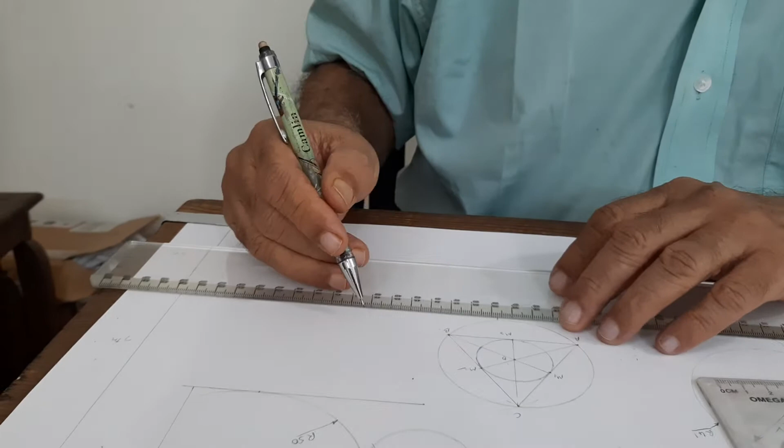We have already started working on triangle, but before that I want to say one thing: when you are drawing on both the sides of the sheet, if you earlier drew on this side and you continue on the next side, then you need not have title blocks on both the sides. Here you need not draw the title block again, or name block, whatever you may call it. The title block is to be drawn only on one side of the drawing sheet, on the right hand side bottom corner.

Now we draw a triangle of, let us say, first of all, no, we draw a circle. The triangle has to be drawn, but it has to be tangent to the given circle. So we take a circle of 25 millimeter radius. This is also quite reasonably good size. 25 millimeter radius. We draw a circle now.

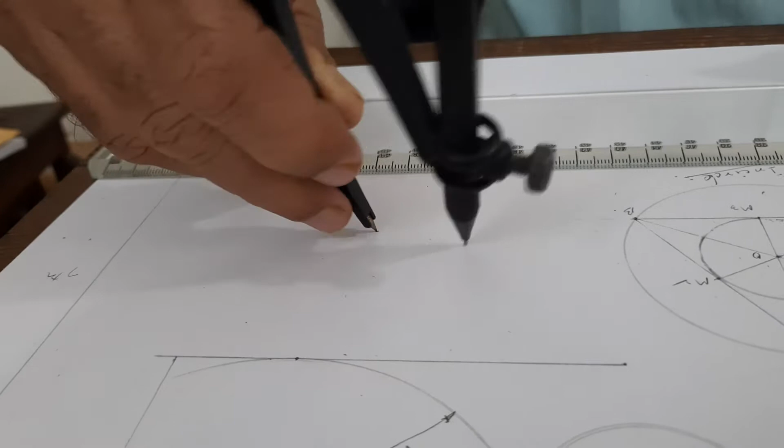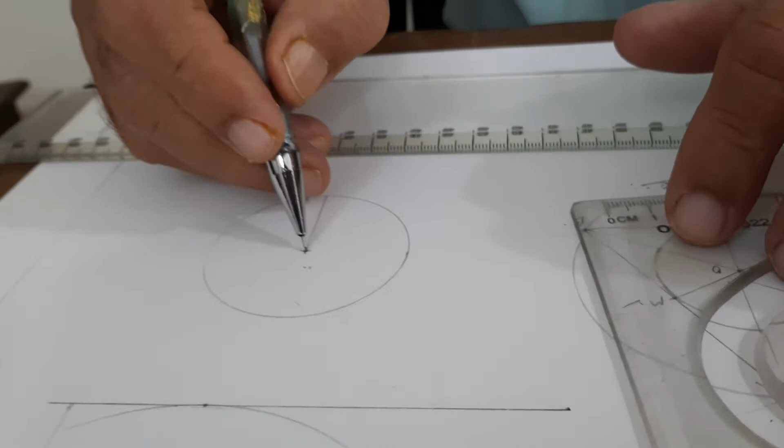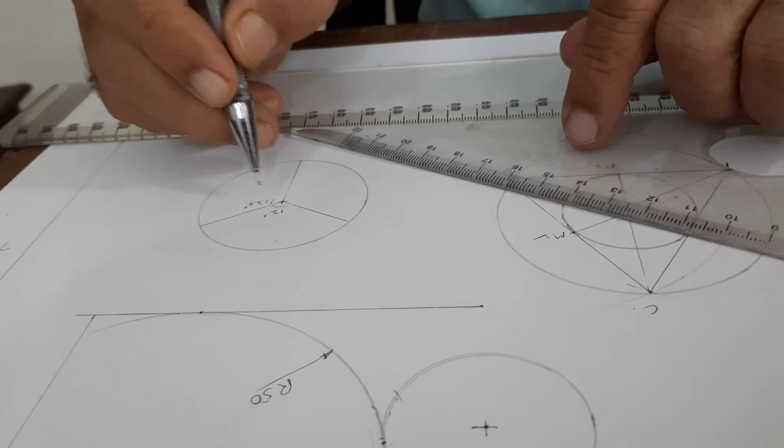This is the center, and draw a vertical line, a vertical radius you may call it, of the circle, then 120 degree. By using the 30-60 set square, you can directly get 120 degree this side and also 120 degree this side. So all the three angles are 120 degree each, and you are making three radii.

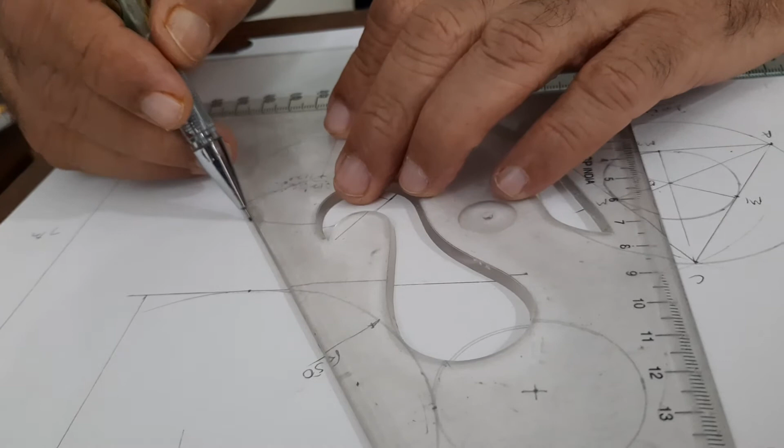Now wherever these radii are, touching the end of the radius, draw a tangent. By using 30-60 degree set square, draw a tangent to the circle. Draw another tangent from here. The tangent will be always perpendicular to the radius. So one tangent this side, another tangent this side, and third tangent perpendicular to this radius at the bottom.

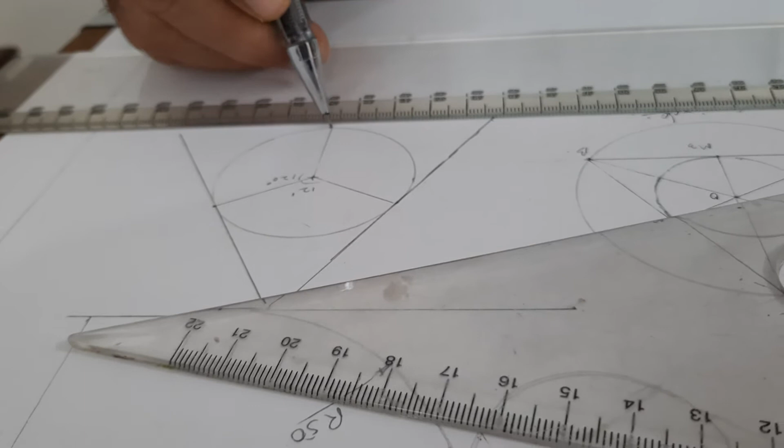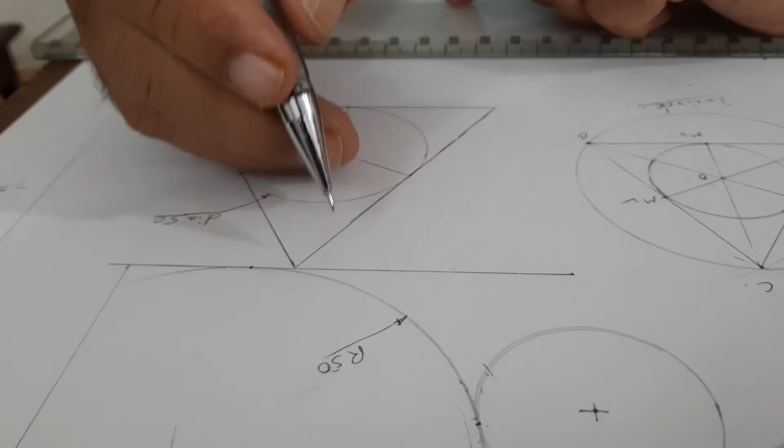This will make a triangle which will have all the sides tangent to the given circle, the given circle of radius 25 or diameter 50. This 50 dia circle has triangle A, B and C tangent to the circle on all the three sides.

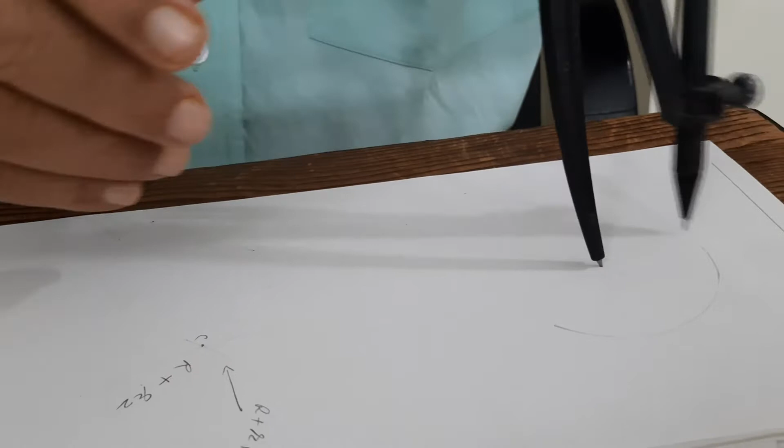Now we want to draw hexagon, with let us say 30 millimeter side. Whatever is the side of hexagon, you have to take that much radius and draw a circle. So take the radius of 30 millimeter and draw a circle. Light circle, not very dark. This is the center of it.

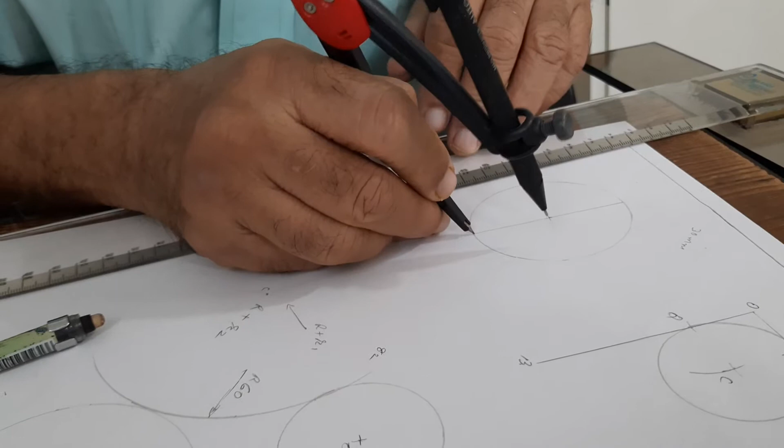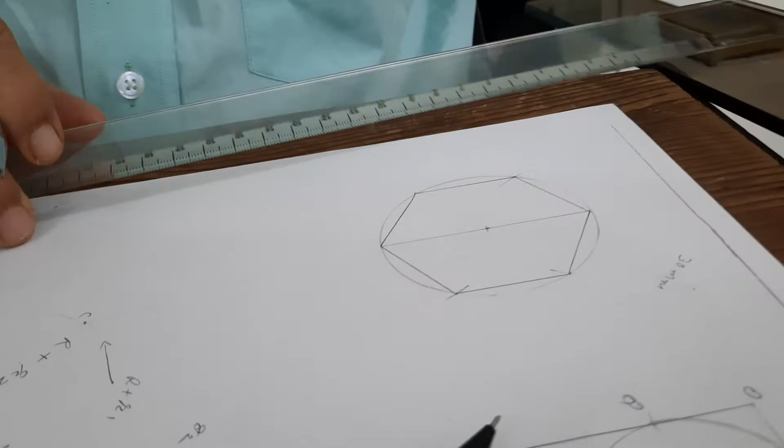Now you can either draw a horizontal diameter or a vertical diameter. If you draw a horizontal diameter, then with same 30 millimeter radius, from one end of the diameter, cut two arcs on the circle. From other end of the diameter, cut two arcs on the circle and join them. Join each one of these points to get a hexagon A, B, C, D, E, F.

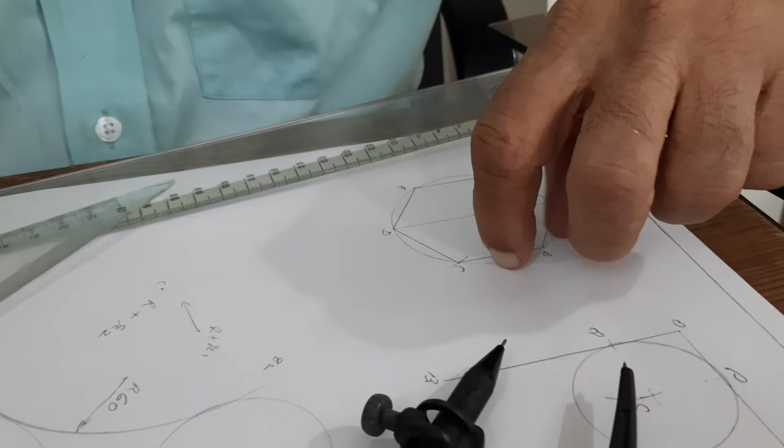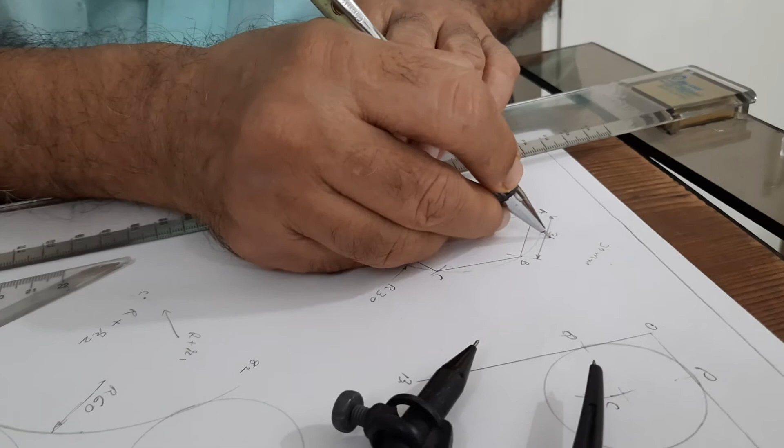This has corners sideways. Now if you want corners up and down, then you have to draw diameter vertically in the circle and start from A and cut 30 mm everywhere to get the hexagon of 30 mm side. So we have to draw a circle of radius 30 to get the side of hexagon as 30 millimeter.

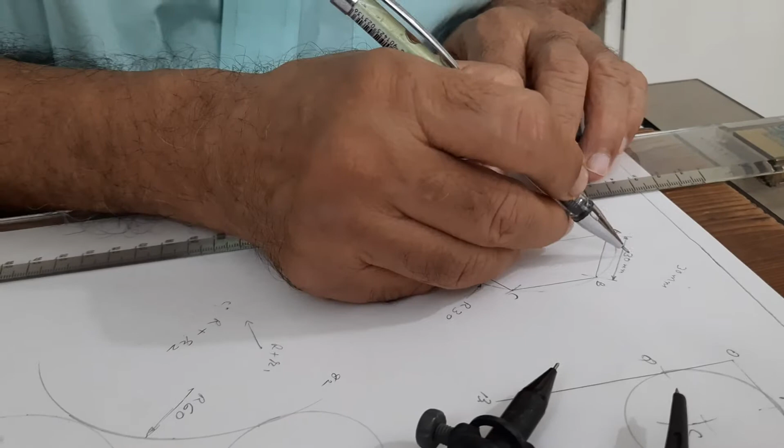And as I said, if you draw a horizontal diameter, then the corners of hexagon will come left side and right side. If you draw a vertical diameter, then the corners will come up and down. This is if the side of hexagon is known, then you take that much radius and draw a circle.

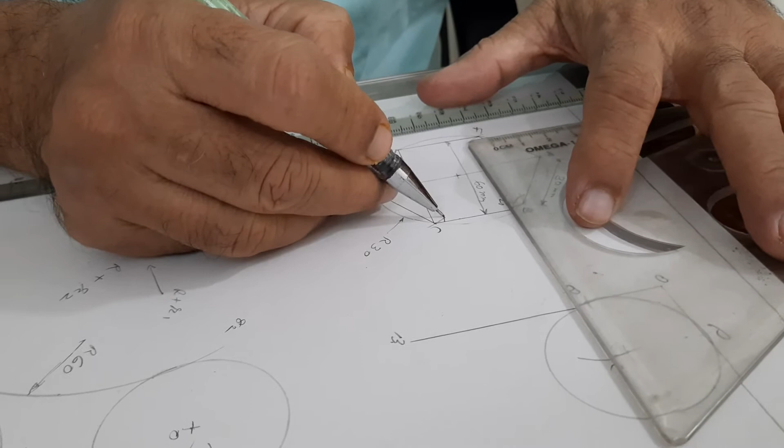If the side is not known, but distance between two parallel sides is known, then how do you draw the hexagon? If the distance is, let us say, 60 millimeter, how do you draw the hexagon? This internal angle of the hexagon is 120 degree. So if you draw a line here, totally it is 120, out of which this is 90. So how much will be this? 30 degree. So we use this knowledge.

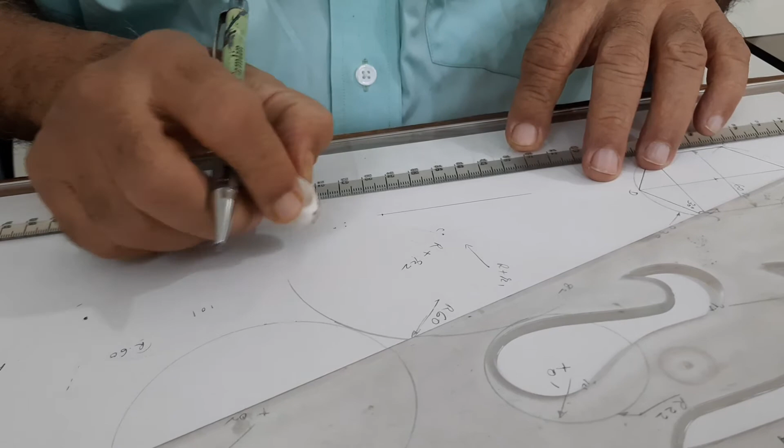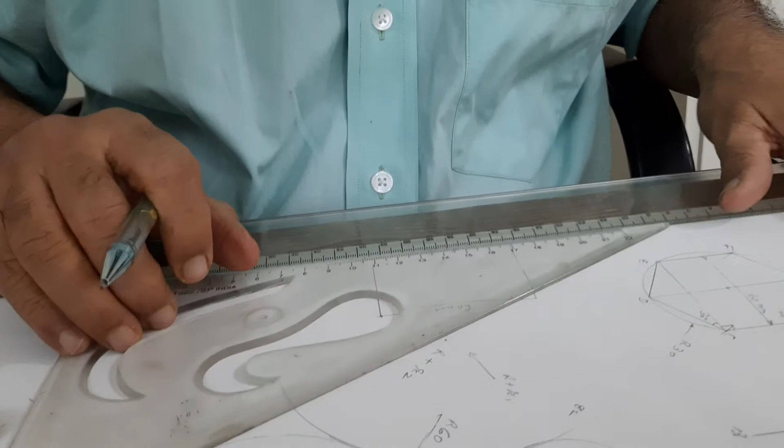Draw a 60 mm line. This is the distance between two parallel sides of hexagon. Now draw a vertically downward line, some line; we do not know what is the length. Draw 30 degree from here, and 30 degree from here.

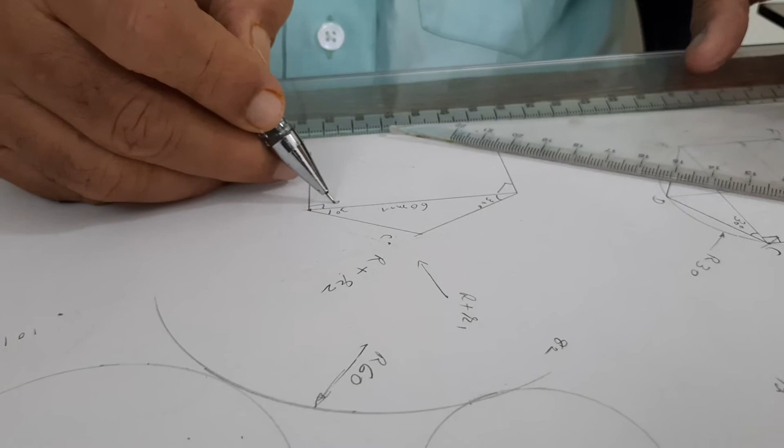This is 30 degree plus this is 90 degree, so this makes one side of hexagon. This is 30 degree and 90 degree; this makes another side of hexagon. Now you got two sides of hexagon. Measure that and cut here to get two more sides of hexagon. Then again from here cut two arcs to get the complete hexagon.

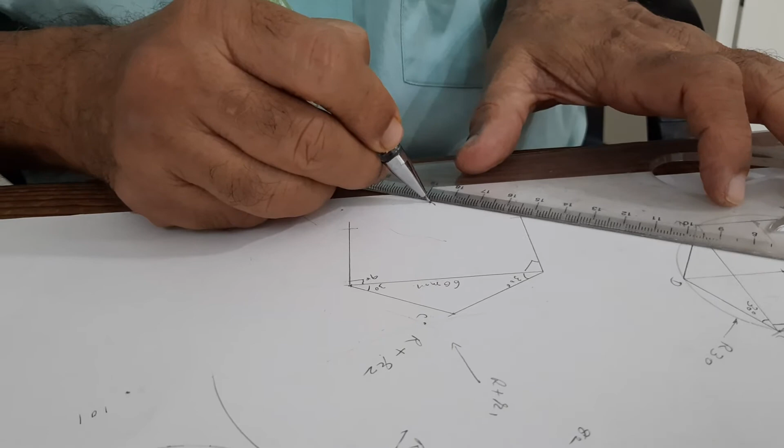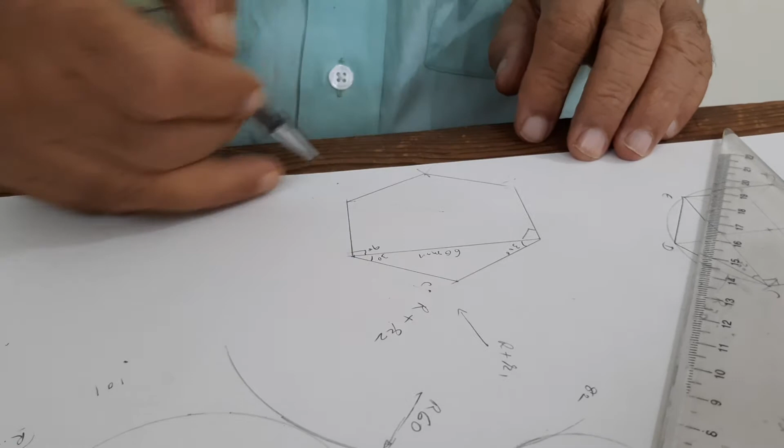Here we did not know the side of hexagon, but distance between two parallel sides was given. So draw 30 degree and get two sides, and then finish the hexagon by drawing the other sides A, B, C, D, E, F. This is the hexagon when the distance between two sides is given, and here hexagon when one side length is known.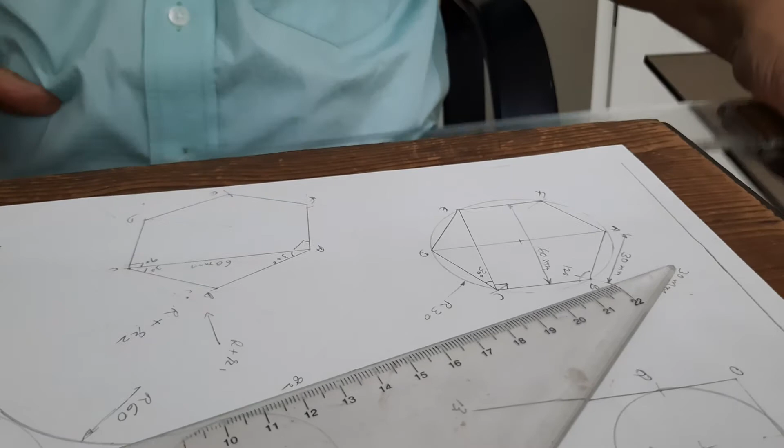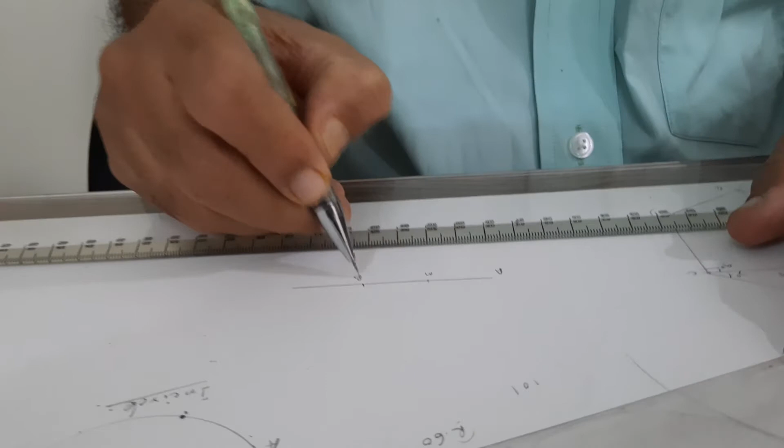Now drawing of the pentagon with 5 sides. Draw a line of, let us say, 40 millimeter. Mark the midpoint of it. Line AB is equal to 40. Mark the midpoint at 20. A, B. This is 40 mm.

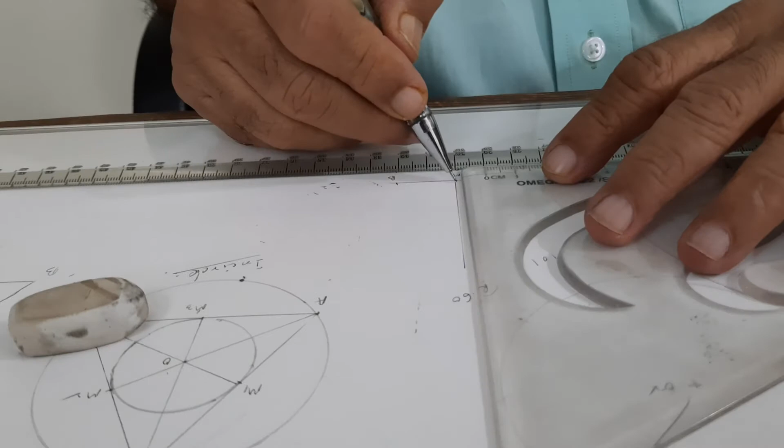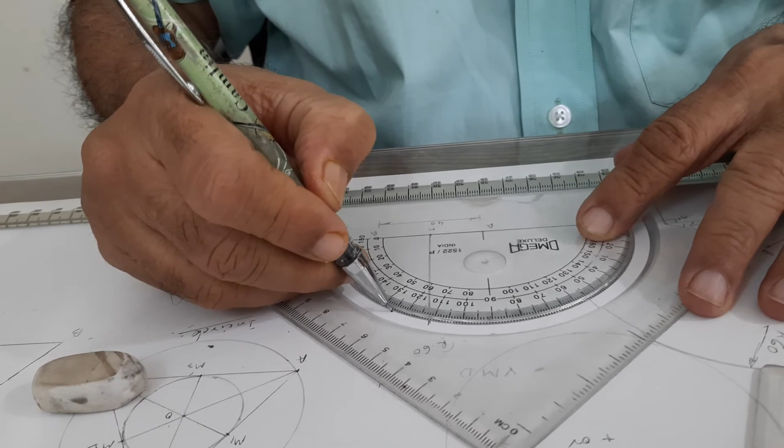Now draw a light line from the midpoint M and draw 54 degree from either point A or point B. Draw 54 degree, that is 10, 20, 30, 40, 50 and 54. Draw a light line from point A. You can also draw from point B.

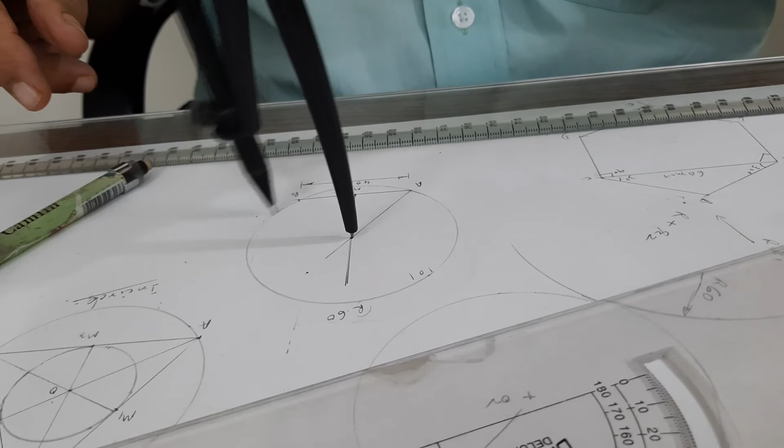Take this point as center and OA as a radius. Draw the circle. Take AB side and cut here. Similarly, cut here to get 5 sides of a pentagon.

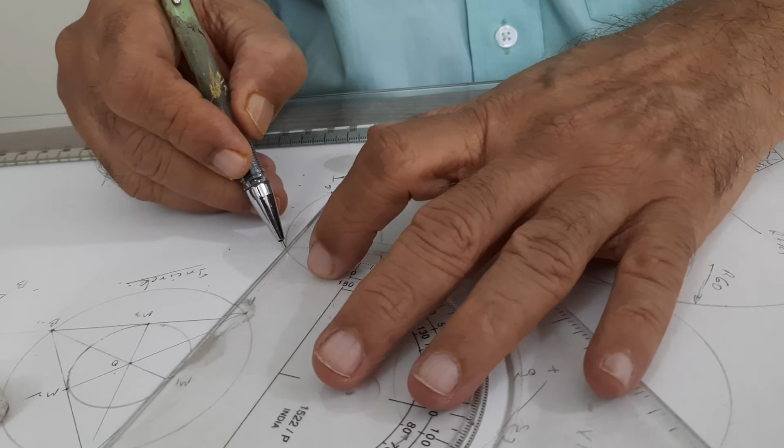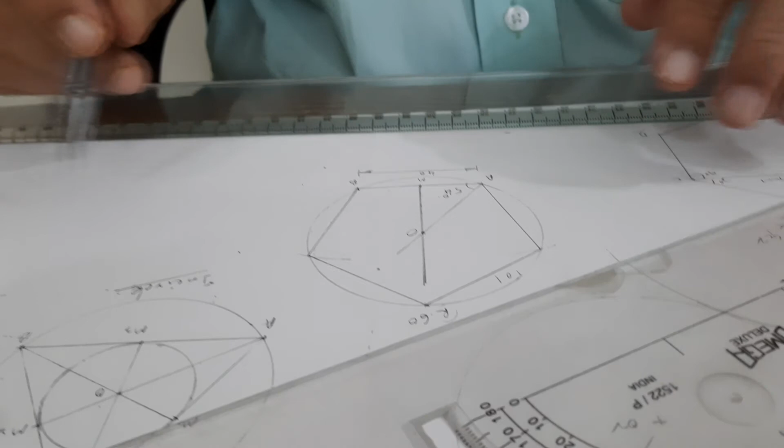Remember, this degree is 54 degree, and with this as a center and OA as a radius, draw the circle to get the pentagon. Each side of pentagon is equal to 40, equal to AB. So A as a center, AB as a radius, cut the arc, B as a center, BA as a radius, cut the arc, and so on to get the pentagon.